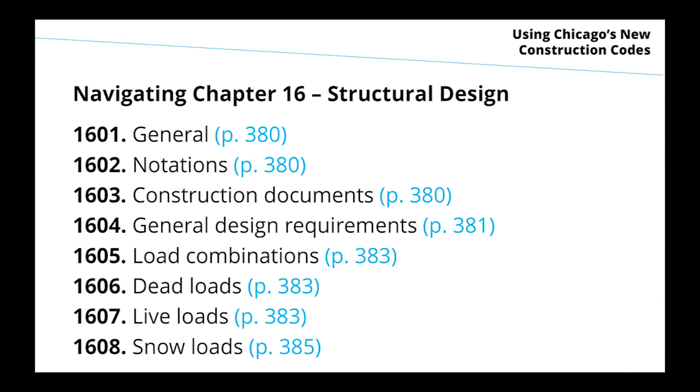Structural design, chapter 16. So this is a chapter that covers a lot of things, and some things are going to be very consistent with what we've been doing, and then there's some new things that come in here, for the most case relaxed, but for some projects, higher risk projects, a little bit stricter.

So this covers everything: earthquake loads, wind loads, snow loads, ice loads. It's going to update to use the 2016 edition of ASCE 7. One thing to keep in mind about both the IBC provisions and the ASCE 7 provisions, it uses ultimate loads instead of working loads like our code today. So it might look like the numbers are going up, but they are not apples to apples numbers. They, in many cases, are going down, even though the absolute numbers are going up, because one is expressed in ultimate loads and one is expressed in working loads. Our current code is in working loads, so lower numbers, which, if expressed as ultimate loads, would be even bigger.

One thing that this code does, which our current code does not do a great job of doing in the structural area, is really recognizing that there's a gradient of risk. So there is a risk classification section at the beginning of the chapter. We've modified it a little bit for Chicago, but it's saying that low risk buildings and ordinary risk buildings don't have to meet the same structural requirements as high hazard buildings that are really going to cause a problem or need to have more reliability in case of a major event: earthquake, wind, storm.

So that's something new for Chicago and is going to allow us to relax the requirements on the very low end for storage structures, small residential buildings, and really only have those requirements triggered for big high-risk things, high-rise buildings, hospitals, and so on. Similarly, there's a little bit more gradation on single-family home porches, balconies that are only attached to a single unit.

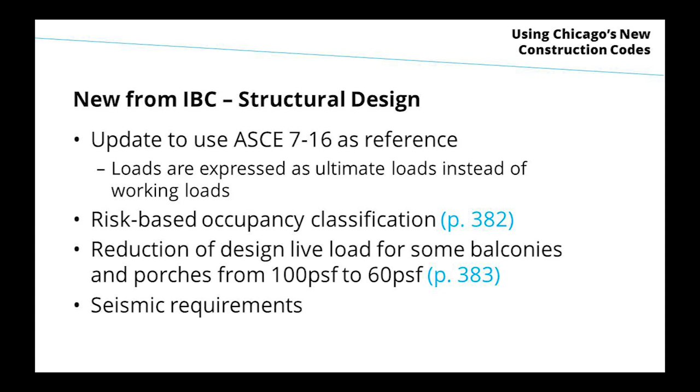And then Chicago is going to adopt some seismic requirements, recognizing that we're in a relatively low seismic risk area. They are not terribly burdensome for most projects, but for the bigger projects on bad soils or risky facilities like hospital emergency rooms or facilities with hazardous chemicals, there are going to be some seismic requirements. The Chicago Code, when it's published in the book form later this year, will replace all of those maps of the country with specific Chicago values, so you won't have to look at a map of Alaska anywhere in the Chicago Building Code.

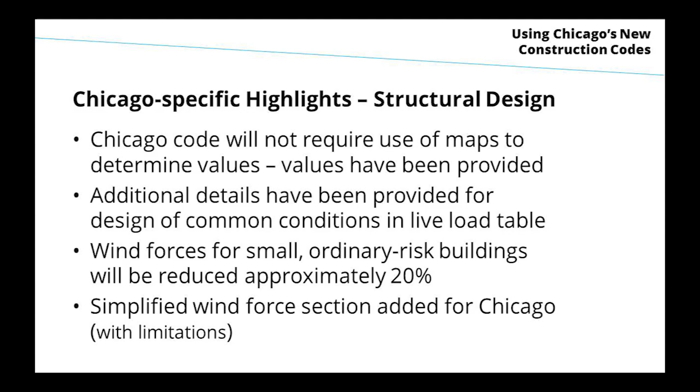Additional details have been provided for some common conditions in the live load table, so some conditions about mechanical rooms and server rooms have been spelled out a little better with advice from the structural engineers who were on that advisory committee. The wind forces for small ordinary risk buildings like a single family home will be reduced approximately 20%. And there will continue to be a simplified wind force section for some ordinary conditions in Chicago, although by moving to very close to the national code, there are also a number of very good tools out there that you can use to apply ASCE provisions to projects without knowing a lot about structural engineering.

Seismic design, just to go over this, is something that's scary. Everyone says, oh, we're going to have seismic design and it's going to be like California. No, it's going to be like the seismic design required in Evanston or Oak Park or anywhere outside of Chicago that's already following the IBC, and in some cases a little bit adjusted. So small residential buildings, the 1 to 3 unit residential buildings, or the other sort of unclassified small residential buildings are going to be totally exempt. Just skip over seismic requirements and keep going. For projects designed with prescriptive wood framing, also exempt. So the seismic redundancy is already built into those prescriptive wood framing methods. Non-occupied storage structures, also exempt.

So then when you actually get into having requirements, the lowest level of requirements, seismic design category A, really says the building has to have a continuous load path, which hopefully all of them already did. And it's not getting into reinforcing mechanical systems or bracing, anything like that. So ordinary risk buildings up to 60 feet, so all buildings up to 60 feet other than hospitals and hazardous chemical facilities, are going to be in seismic design category A regardless of their soil or structural system. And based on their structural system, that exception might apply up to about 130 feet.

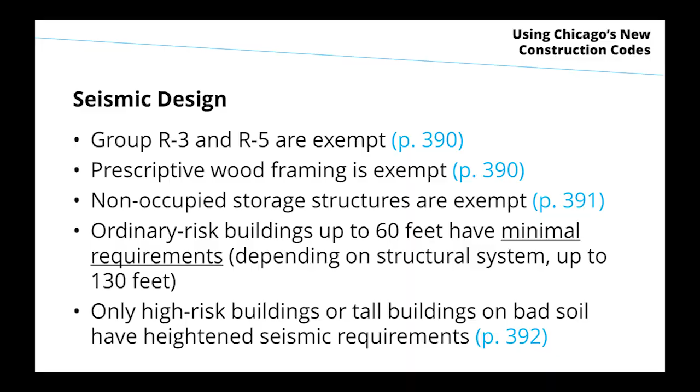Only on high-risk buildings, tall buildings, or soil that's really bad, and we don't have a lot of it, but we have some of it here in Chicago, will there be heightened seismic requirements, and those sort of requirements about bracing mechanical systems are only really going to be triggered when you get into those very specialized facilities, hospitals with emergency care or hazardous chemicals on site.

Special inspections and tests. This is going to be an area that is going to be a little bit new for Chicago, and we're going to have to work very closely with industry to make sure this rolls out in a smooth way. So one thing that the model codes rely on and other jurisdictions rely on when there are a wider range of materials allowed, some of those materials are more complicated, more sensitive if they aren't installed correctly to creating a risk. So there is a reliance on having some third parties supplement departmental inspections in the construction process.

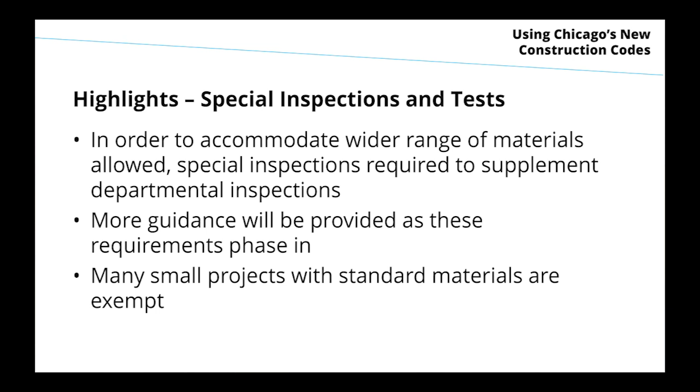So we have adopted those requirements here in some ways with some modifications. There is recognition that some small projects will not have to be subject to those requirements. Some standard materials will not have to be subject to those requirements, but for some materials, there will be these requirements, and there will be more guidance from the department, and probably another presentation like this, specifically around this for contractors to understand what our expectations are going to be around special inspections and tests as we roll this out late this year and more in 2020.

Soils and foundations. This is an area where it's a good hybrid, I think, of the model code provisions and what we've been doing for a long time. So this spells out when a geotechnical investigation is required and at what point in the design process or permitting process it needs to be available, and recognizing that the way we've done it here for a long time is not the way the model code would spell it out. The model code has been amended largely to reflect how it's been done in Chicago to date.

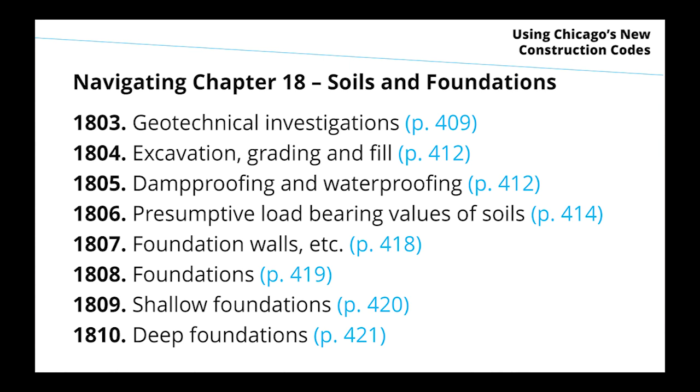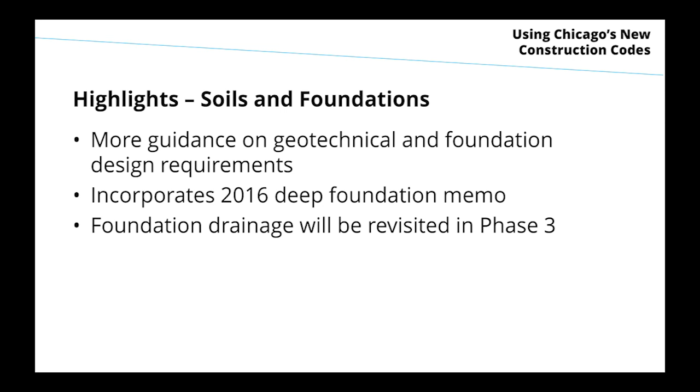There's going to be incorporation of some things about deep foundations, which are fairly specialized, but the people who work on those were very excited that those were being folded into this code and made permanent. And then some things about foundation drainage, which again tie into plumbing and stormwater, and some of those issues will probably be revisited in phase 3 when we deal with those in depth.

For geotechnical investigations, again spelling out that we're going to be different than what the model code says about how these work. There's 3 exemptions from full investigation, so single-story structures up to 2,000 square feet, storage structures up to 2,000 square feet, alterations and additions with less than 5% increase in live load or loads, and some shallow excavations can use a conservative presumptive value table.

Pre-permit exemption from investigation, so that means that we will continue to allow assumed values on permit drawings as long as those are confirmed in the field before construction work begins. That's going to be the smaller buildings up to 4 stories, covering up to 16,000 square feet, and with no excavation below 8 feet called for in the drawings.

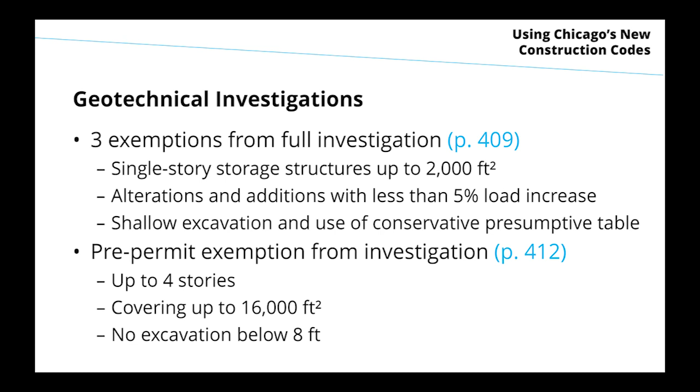Once we get into these material-specific chapters, I'm going to go through them more quickly because what I have to say about them is pretty much the same. The highlight is that we are moving to up-to-date standards for recognition of these various products. And these chapters, there wasn't a lot of Chicago-specific already in there, and there wasn't a lot of disagreement that we needed to keep something that was Chicago special. So there's a few highlights as we go through about new materials that are recognized.

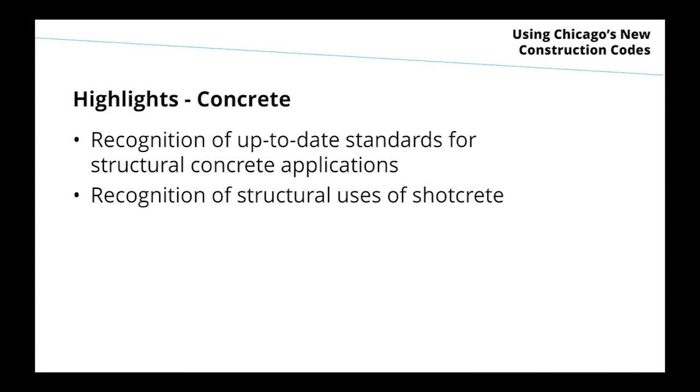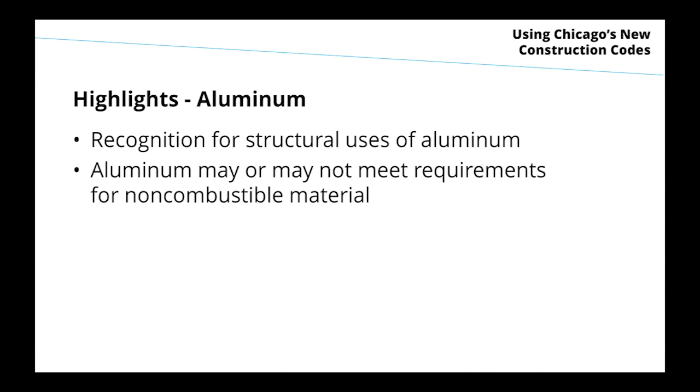Structural use of shotcrete will now have code provisions spelled out. Before that would have required special requests and meetings with us to go over and understand exactly what was being requested, but now it will be spelled out in the code. Similarly for aluminum, our code today really didn't recognize aluminum at all, especially for structural uses. It will be recognized. It may or may not meet requirements for combustibility, so it may or may not be a non-combustible material, but is recognized for structural uses with those limitations.

Masonry, our code today says very little about masonry and how it's supposed to be designed. There's some references to some very old reference standards. The masonry industry, masons in Chicago have been asking for a long time for us to have an updated masonry code, and this will accomplish that. It will retain some of the Chicago-specific limitations from our experience from the 90s and 2000s with the poor performance of certain single-wythe masonry for residential applications, so it will maintain those stricter requirements.

And so Chicago has been working on updating its code for a long time and really thought it was there in the early 2000s. So as part of that, they adopted a new mechanical code and repealed some old provisions. Some of the provisions they repealed thinking that there would be a new building code in a few months were all of Chicago's provisions about masonry chimneys and fireplaces, and no one has actually filled them back in since then.

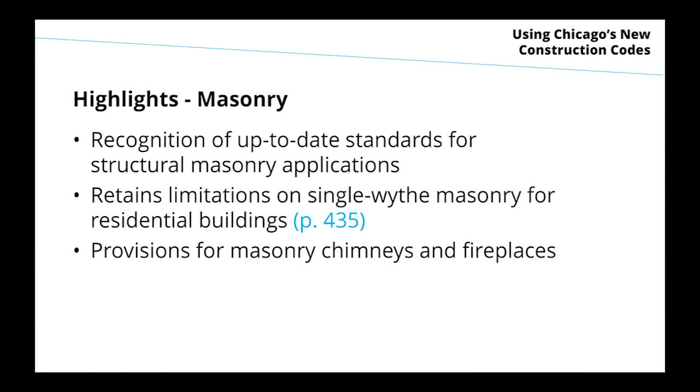So we've had about 15 years with no requirements for masonry fireplaces and chimneys and no guidance if you want to do it. So we will actually get those back in our code with this ordinance. Steel, again, recognition of the latest standards.

One thing, we have a memo that we put out about 2 years ago about the use of cold formed light frame construction and some limitations around that and expectations about masonry cores, both for structural reasons and fire protection reasons. And so that will remain for buildings over 55 feet in height.

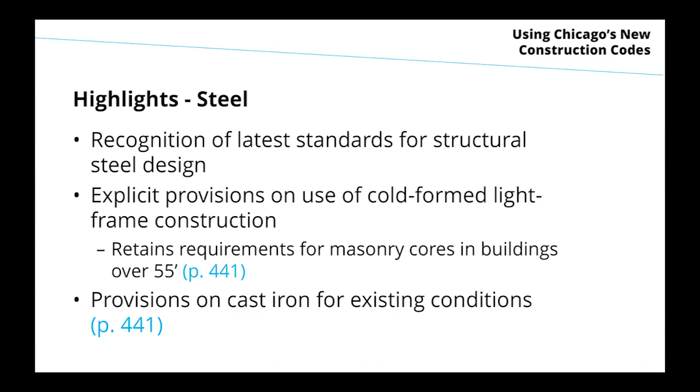And then one thing, and it's not really steel, but it got stuck in this chapter for existing conditions where there is cast iron that needs to be evaluated. Some provisions from our code today about the evaluation of existing cast iron are stuck in the back of the steel chapter.

Wood, this is an area where I think there's a lot of excitement, interest about doing things with wood. This is really dealing with structural uses of wood. We're moving towards recognizing more. There are still some limitations on it. As I said earlier, Chicago has some skepticism about fire retardant treated wood in certain applications and is more restrictive on that still. We've had some bad experience with it in weather exposed conditions in Chicago and deteriorating more rapidly than it should. But we are recognizing those.

Cross-laminated timber, which is popular and we hear a lot about, still is going to require case-by-case approval. So that is going to require a meeting with us to make sure that we understand what's going on with that. And hopefully in a few years that can be further relaxed as we have more experience with that. But that was one of the limitations imposed around that.

There is going to be explicit recognition of some prescriptive framing methods for smaller light frame wood construction as a path to simplified structural design for some of those smaller structures. That is going to be a good option. There's guidance out there around doing that in various ways from the wood industry and others.

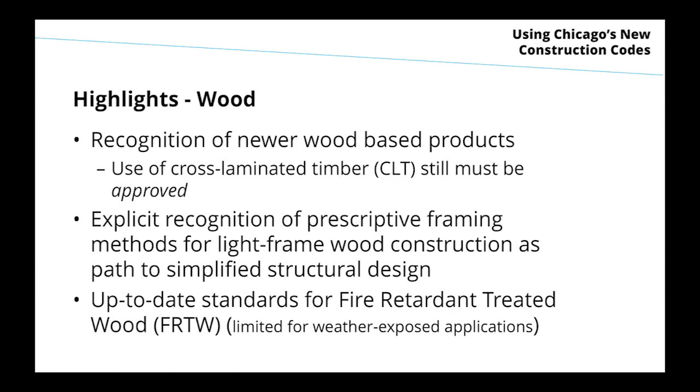And then up-to-date standards for fire retardant treated wood. So it is recognized for some applications today. It's going to be recognized for a broader range of applications, but it's not recognized for the full range of applications that the model code would allow. So don't let the wood industry representative tell you it's allowed everywhere. There are still limitations in Chicago, but there are going to be some. So we'll work with them to try and not have them oversell that.

Glass and glazing. So Chicago has been relatively silent or fairly restrictive about some of the topics in this chapter, and we are moving really towards the national standards on this. So recognition of the structural use of glass without special permission or spelling things out. Recognition of more contemporary requirements for safety glazing where it's required and what can perform as safety glazing.

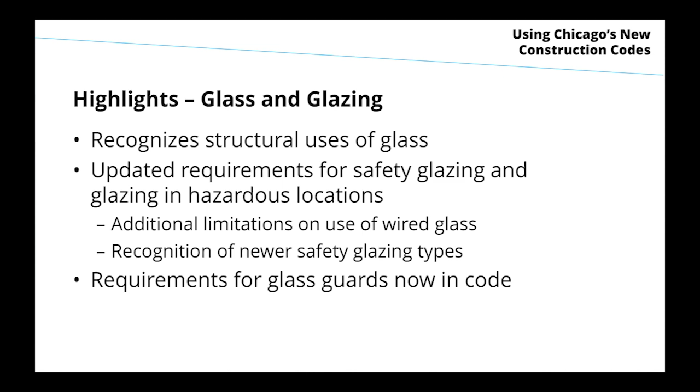So there will be some additional limitations on the use of wired glass above and beyond our code today, but also some recognition of some newer safety glazing types without special permission. And then some better spelled out requirements for use of glass guards and some broader recognition of non-glass plastic-based glazing for some skylight conditions is both in this chapter and the plastic chapter.

Gypsum board, gypsum panel products, and plaster. This is, again, up to date. I'm going to sound like a broken record here, up to date standards. But this one actually is older than our current code. The standard that's referenced is from 1946, and gold star to anyone who can actually find the 1946 standard on plaster use. I'm not sure anyone has a copy of that. Someone probably does. I know the department does not, so I don't know how we're enforcing it.

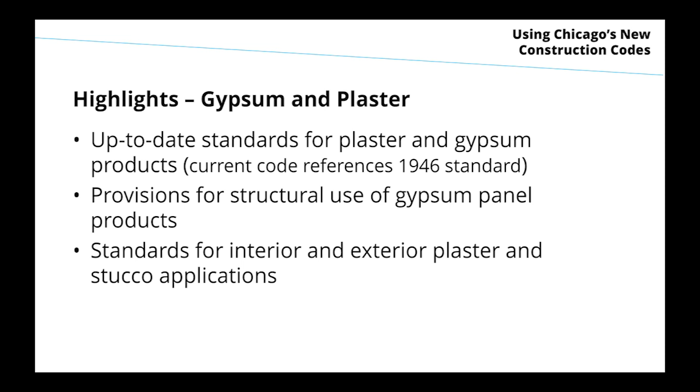Updated use for some structural use of gypsum panel products, probably a pretty rare application here, but there are some provisions for it. And then interior and exterior plaster and stucco applications.

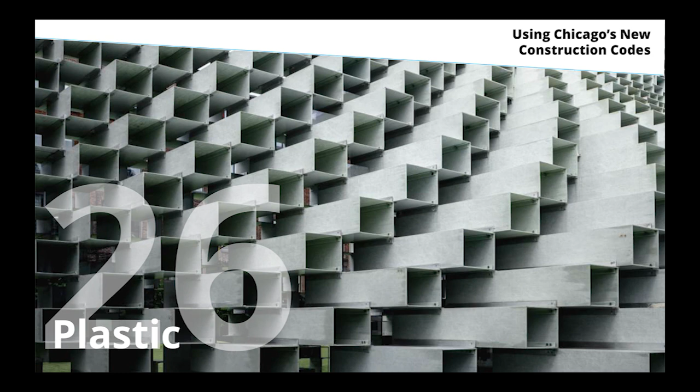Plastics chapter. Actually, plastics, we have put some provisions in our code, so we're not as out of date in this area as one might have thought, especially around foam plastic insulation. We do have some requirements from 10 or 20 years ago about that, but those are carried forward in citing newer editions of the reference standards there.

Some more clear provisions about plastic trim and veneer and light transmitting plastics and plastic glazing. I think that's an area where we've gotten lots of questions. There's some strange references to it in the rehab code that exists today, but this will recognize that there are some applications where plastic for skylight use is acceptable. And then some provisions in this chapter, understandably, the fire department wanted to be more restrictive than IBC, and that is accomplished.

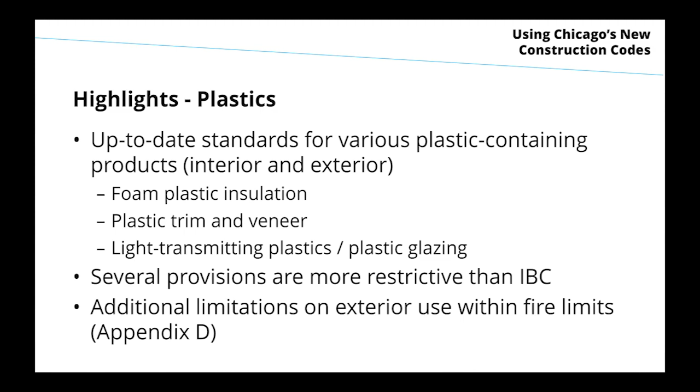And then, just like today, although some people don't know they exist today, there are fire limits that are defined as an area around downtown where there are stricter requirements. One area is exterior use of plastics. That will continue to have some greater restrictions within those fire limits, and there's a slide later on to show where they are.